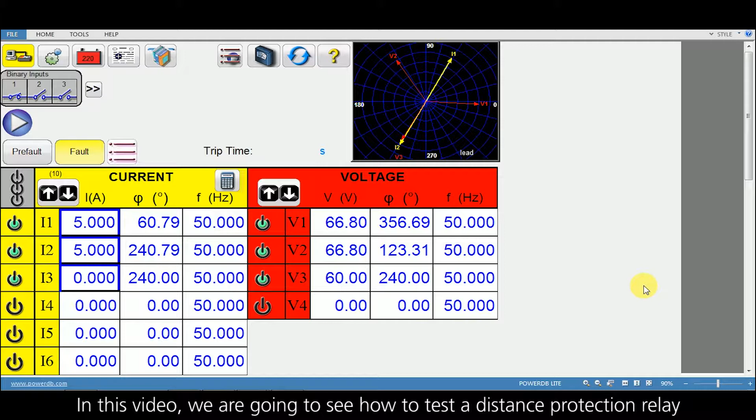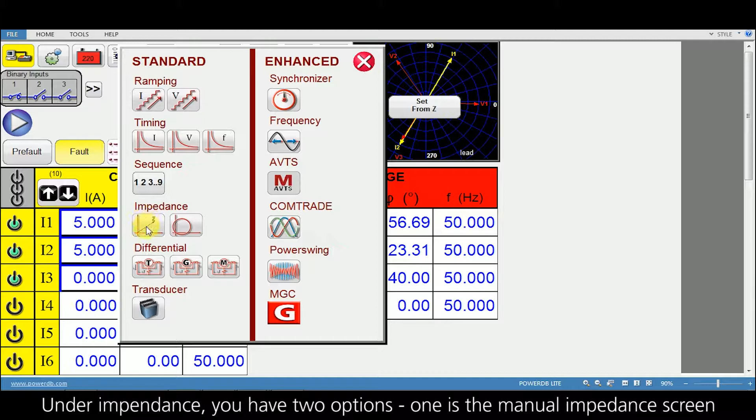In this video, we are going to see how to test a distance protection relay using the internal XRIO module. So you have the option here, the enhanced menu. When I click on this, you have the impedance screen. Under impedance, you have two options. One is the manual impedance screen, where you can enter the values and test directly without reproducing the entire relay settings, and the other is the automated module, where the full-fledged library is available. So let us see the library module.

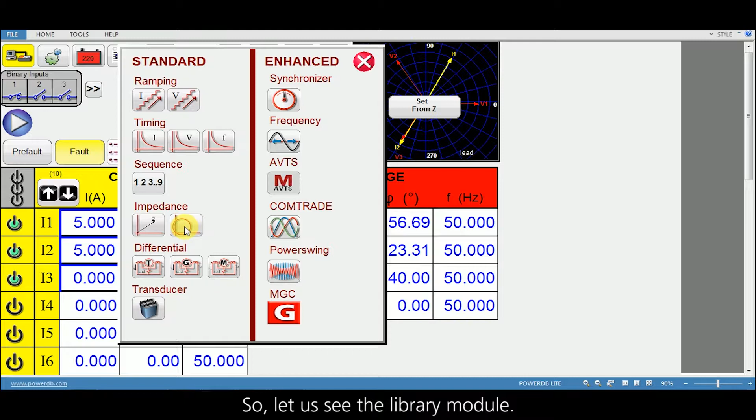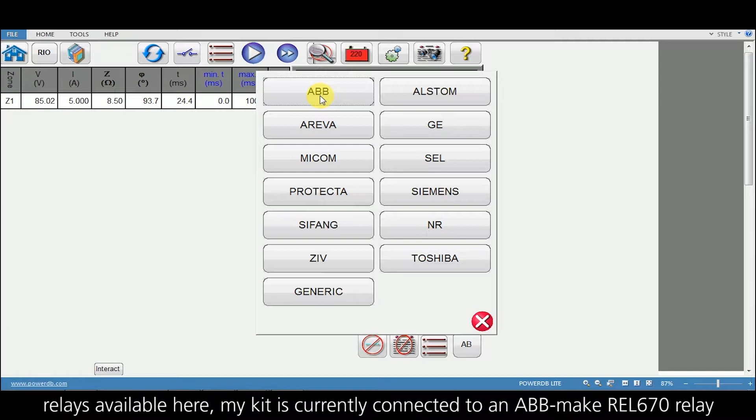In the library module, you have the option to import the RIO file and also the library. So let me click on the library. You have the list of relays available here. My test kit is currently connected to ABB make REL 670 relay. I will select REL 670 from this list, and this is the place where I enter the values as per the relay.

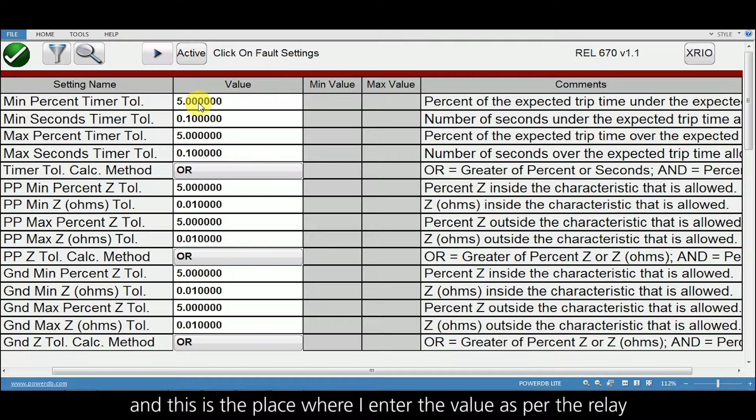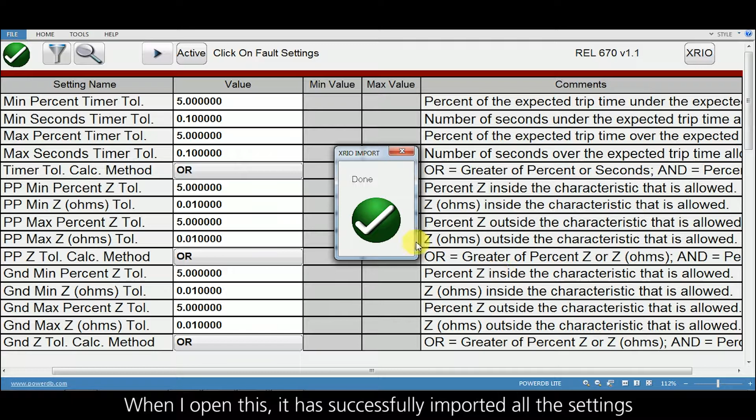Alternatively, I can also import the XRIO file, which I have saved in my desktop as rel670.xrio. When I open this, it has successfully imported all the settings. So let me put a tick mark.

You have two menu screens here. This is menu A and this is another menu B. So when I click on this menu A, it goes back to the previous menu where I can modify the values or import the XRIO file. If I click on this menu B, this is for test screen menu.

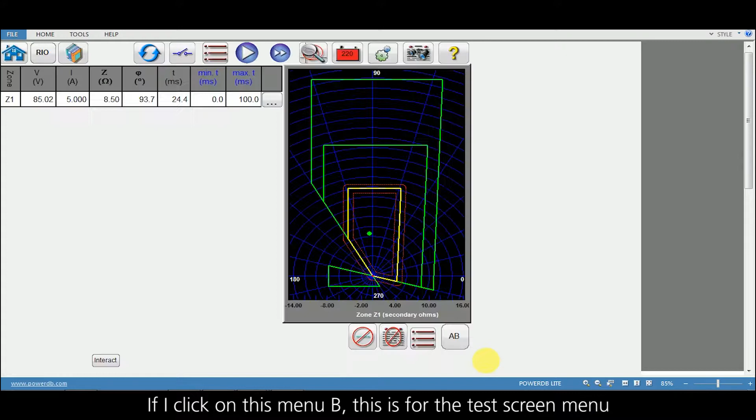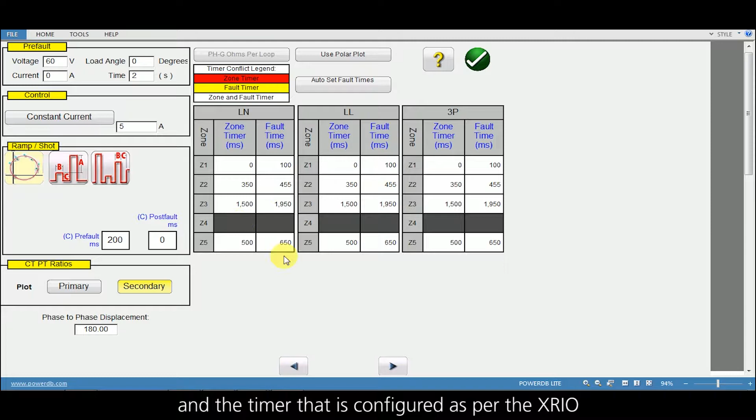So when I click on this, it provides the following options: pre-fault, control, ramp or shot, CT or PT ratios, and the timers that is configured as per the XRIO. So the REL 670 relay has 5 zones, in which 4th zone is disabled in the settings in this relay. 1, 2, 3 is configured for forward, and the reverse is configured as zone 5.

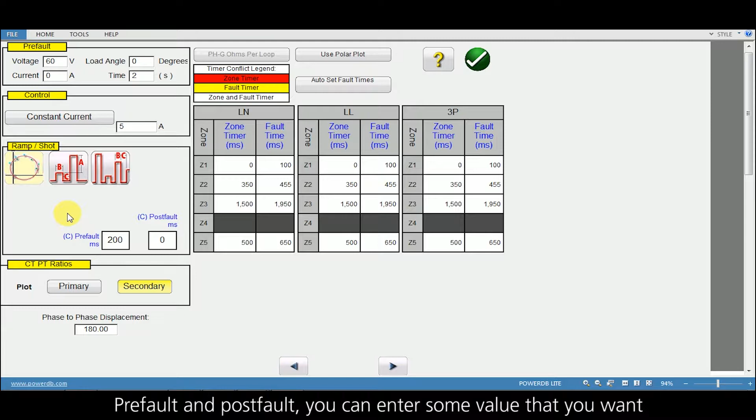Pre-fault, I have defined it for 2 seconds with 60 volt, constant current, limiting the current to 5 amps. Pre-fault and post-fault, you can enter some value that you want. Ramp or shot. So you have 3 options here. The first one is a random shot test, where you can click on any location of this impedance plane and create a fault.

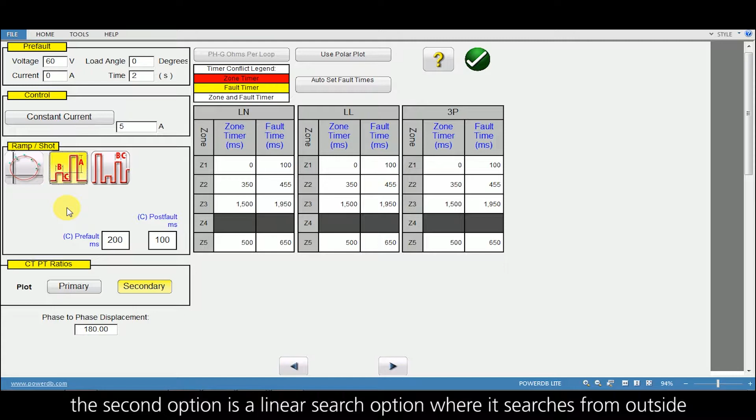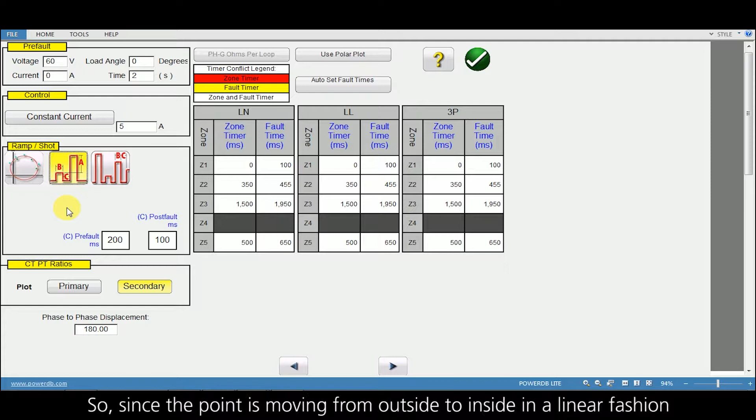The second option is a linear search option, where it searches from outside and it moves towards the zone in a linear fashion and tries to identify the exact point where the relay operates. In this way, it provides the exact point where the zones are created, the zone boundary to be more specific. So since the point is moving from outside to inside in a linear fashion, this test we call it as linear search.

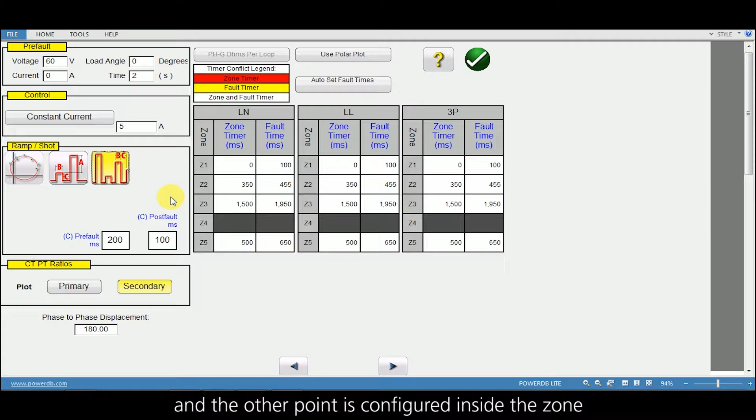The other option is pulse binary search, in which one point is configured outside the zone and the other point is configured inside the zone. So let us say your impedance boundary is at 10 ohms. So first I give a fault at 20 ohms and ensure that the relay is not tripping. Then I give a fault at maybe 2 ohms and ensure that the relay is tripping. So if this is true, then I come near the boundary.

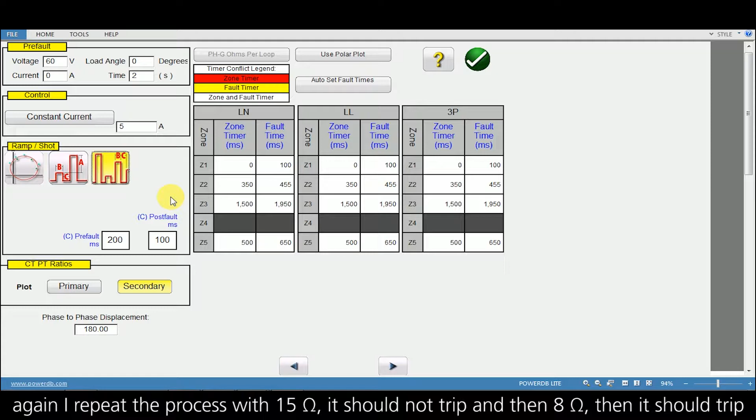Again I repeat the process with 15 ohms, it should not trip. Then 8 ohms, it should trip. Then again come closer. So in this way I give pulse binary values and identify the zone. So this is the way by which these two ramping tests are configured. So let me first play the shot test.

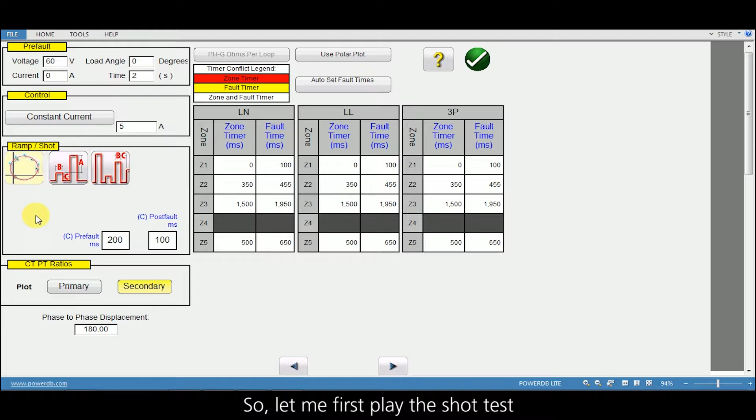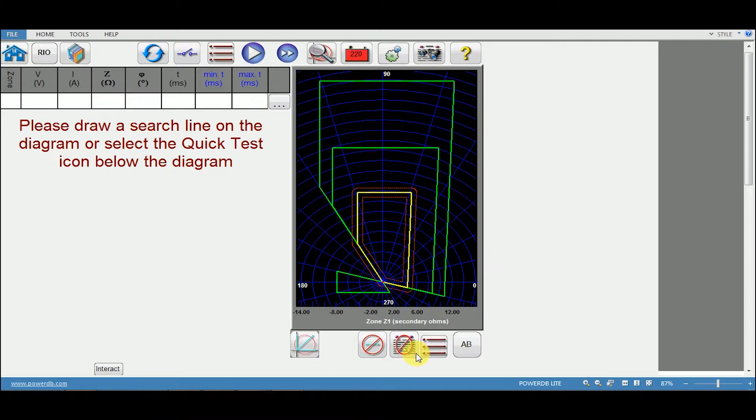We also have this polar or rectangular plot option. So let me keep it as polar so that I can view my impedance and angle. Let me clear all the results and remove all the fault types. So I have the zones as per my relay: zone 1, zone 2, zone 3 and zone 5. The type of fault I can select from here: single phase to ground, phase to phase, 3 phase. So let me select the A phase to B phase fault.

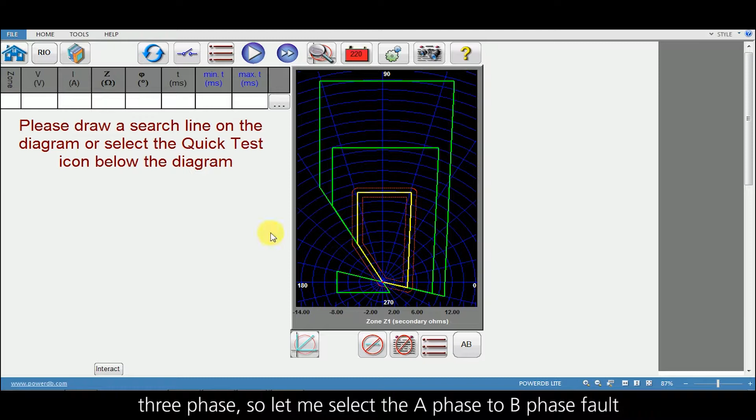So since I am in a shot test, I can click anywhere. So let me click here randomly. So the moment I click, I get the impedance, magnitude and angle, which can further be edited and fine-tuned in case required.

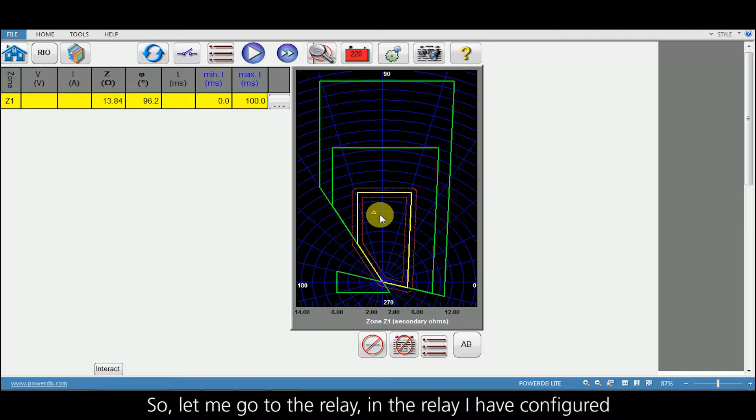So let me go to the relay. In the relay I have configured second LED for zone 1, third for zone 2, fourth for zone 3, fifth for zone 4, and sixth for zone 5. So zone 4 is disabled, we have the reverse zone as zone 5. So let me run this test. To run this test, just click this play button.

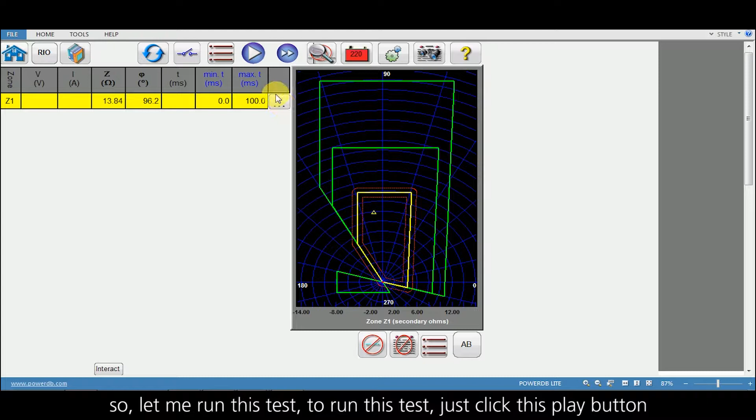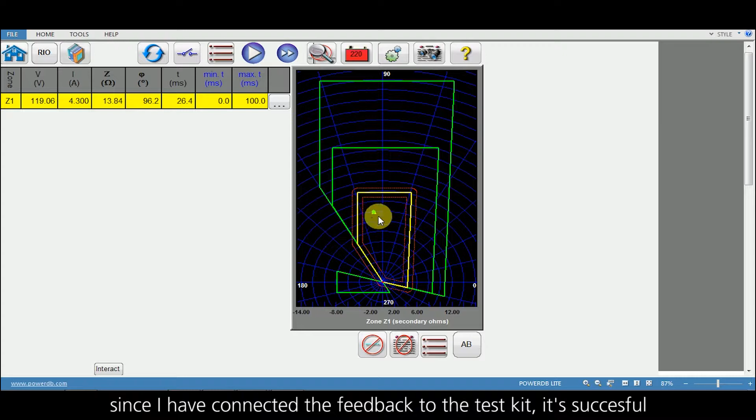You can see that the relay has tripped zone 1, and you also get the fault location here, 167.85 kilometer, which is 63%. And in the software you can see it's green in color. Since I have connected the feedback to the test kit, it's successful. Now let's go to the second zone, another point. Let me reset the LEDs.

Okay, I'm going to play this fault. This is a zone 2 fault, so the relay has operated in zone 2. So let me do a zone 3 fault. Let me reset the relay.

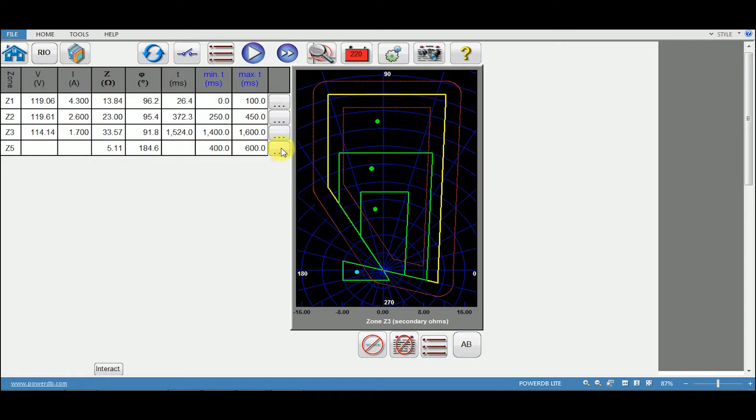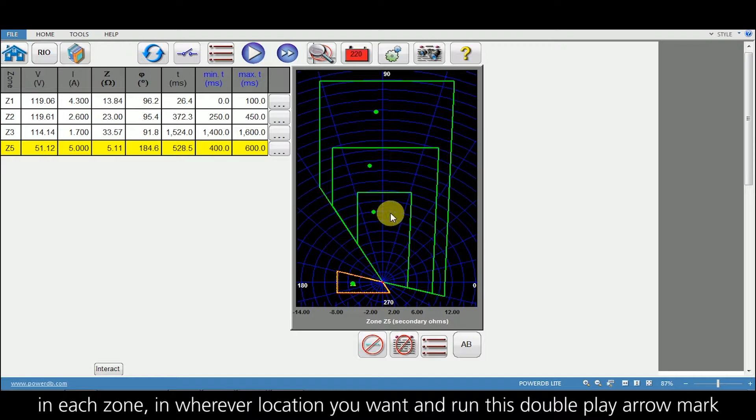Zone 3 and another in zone 5. Let me reset the relay. So this is how we do this testing. You can select as many points as you want in each zone, in whatever location you want, and just run this double play arrow mark.

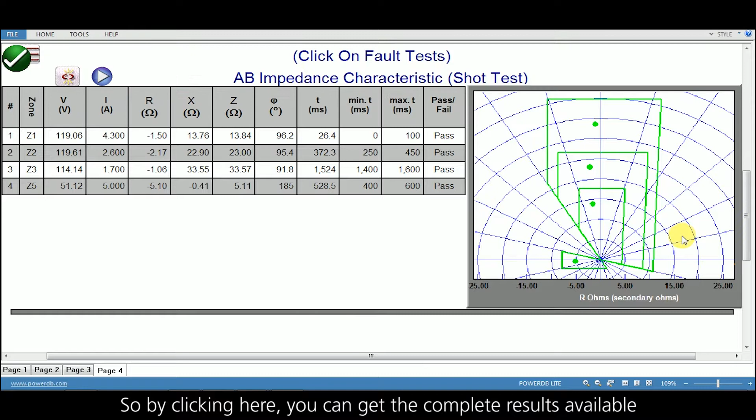Everything will be run in sequence and you get the results here. The results are saved in this location. So by clicking here you can get the complete results available. And one advantage of this results window is you can play back the fault again from the report.

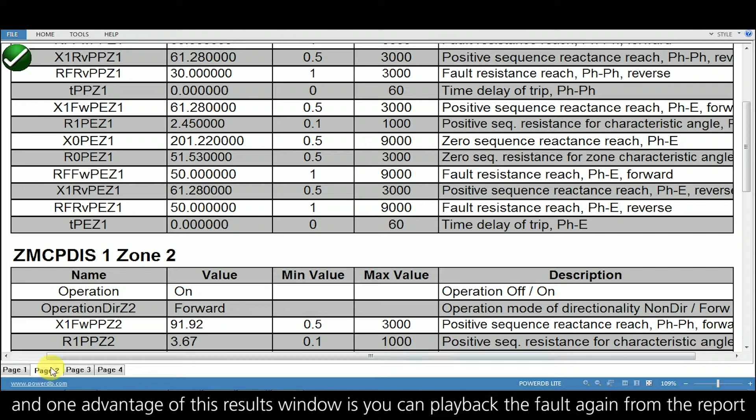So when I import or save this report, you can open it in another laptop where the software is installed, and you can import and just click on this tick mark. It goes back to the previous menu and imports from the test results.

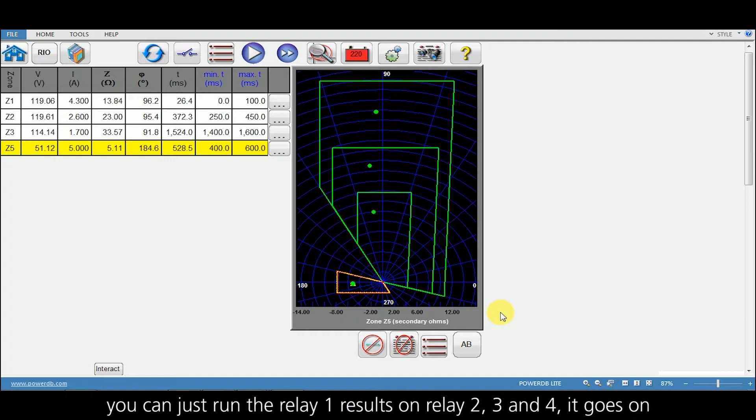So for 4 or 5 relays with similar settings, you need not create the test plan again and again. You can just run the relay 1 results on relay 2, 3 and 4. It goes on. So this is the simplest way to do it using XRIO.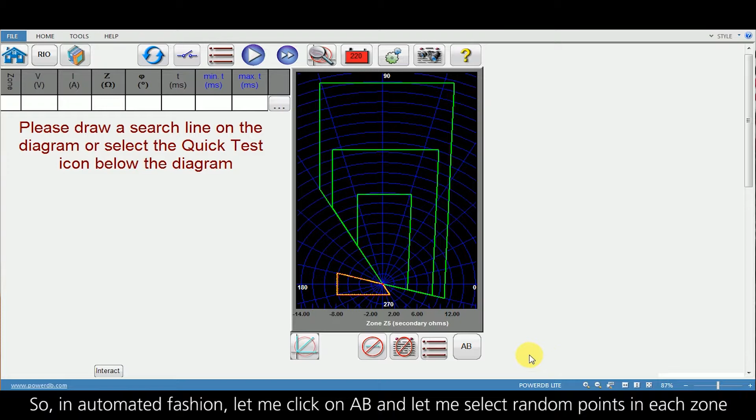Now we are going to see how to test phase to ground, 3-phase fault and phase to phase fault in an automated fashion. Let me click on AB and let me select random points in each zone. Then I am going to select A phase to ground, and I am selecting points in each zone, repeating the same process for 3-phase.

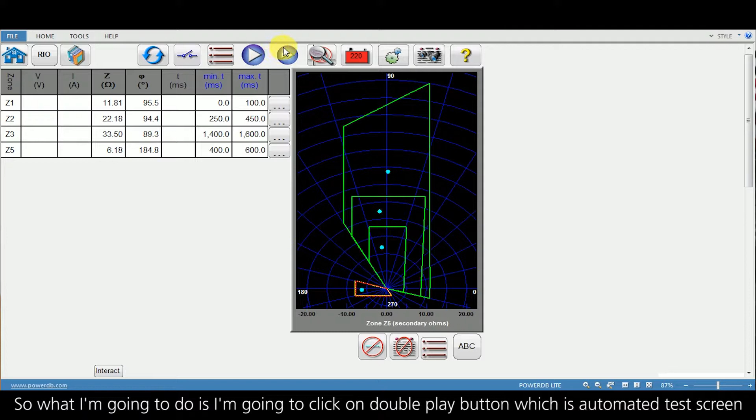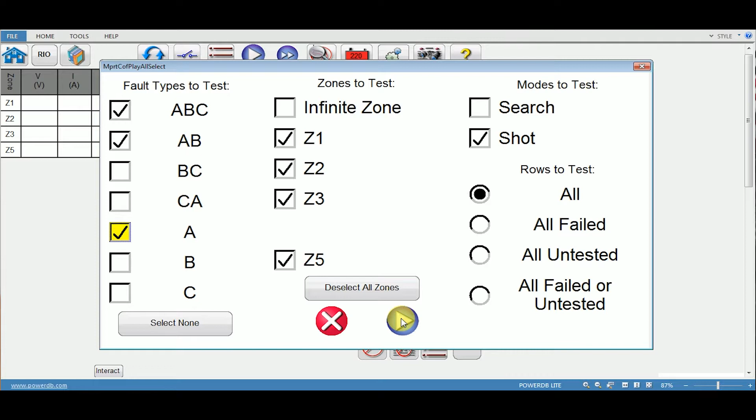So what I am going to do is click on this double play button, which is an automated test screen for playing everything. The phases you want to play, you can select here. So let me select AB, A phase and ABC for all the zones, shot test. So when I click the play button, it's going to run everything in sequence. So let's see how it works.

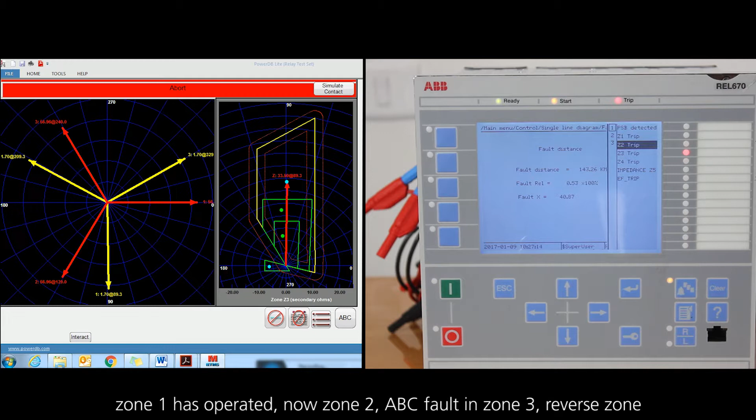Now we are going to see an ABC fault. It's injecting an ABC fault in zone 1, zone 1 operated. Now it's zone 2, ABC fault in zone 3, reverse zone. Now it has moved to AB. So the green indicates that the feedback is in accordance with the time and the test case is passed.

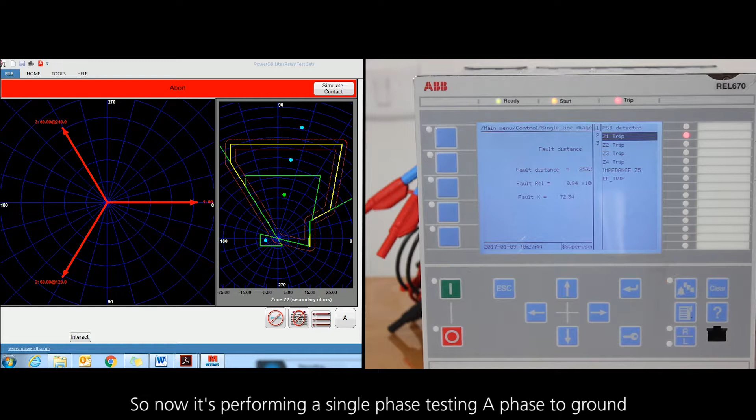So now it's performing a single phase testing, A phase to ground, for all the three forward zones and now in the reverse zone. So that's it. It's a simple test, and you can see the results here by clicking on this tab.

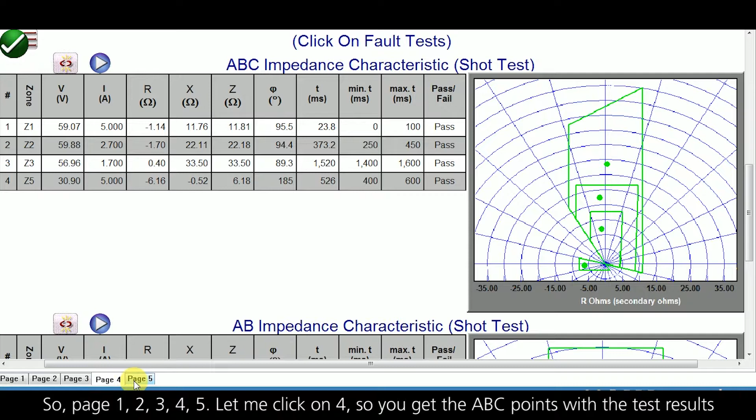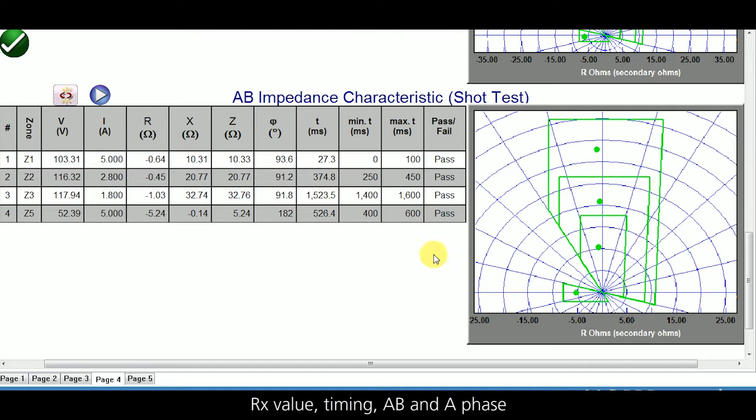So page 1, 2, 3, 4, 5. So let me click on 4. So you get these ABC points with the test results, RX value, timing, AB, and A phase.

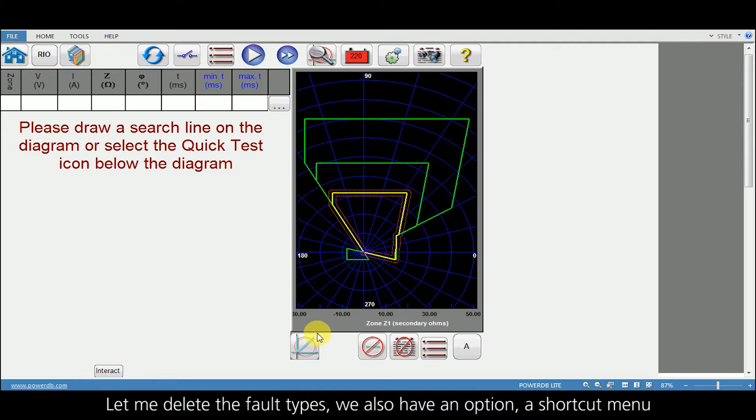In shot test, we are going to see one more option for choosing the number of points. So we saw the random clicking of points like this in each zone. Let me delete the fault types. So you also have an option, a shortcut menu. So by pressing here, it automatically selects the points. So it's a quick way to do the testing.

Now let us see the results section, how to play the file back from the results. For that I am going to do a shot test with 2 points, which is already tested. So let me run the test again. One in zone 1, and another point in zone 2. I have done both the tests for R phase to ground, A phase to ground here.

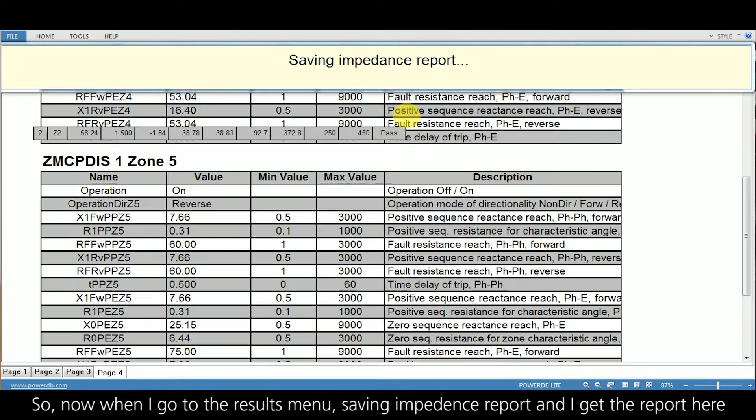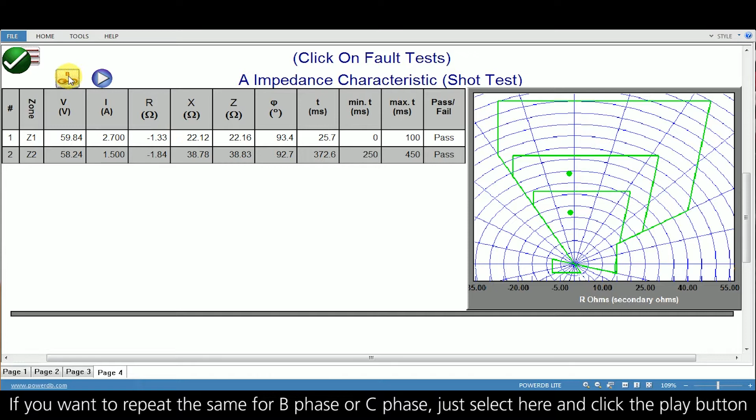So now when I go to the results menu, saving impedance report, I get the report here. Now from here you can see I can select any phase. So we have already done the result in A phase. If you want to repeat the same for B phase or for C phase, just select here and click the play button, execute all in group C.

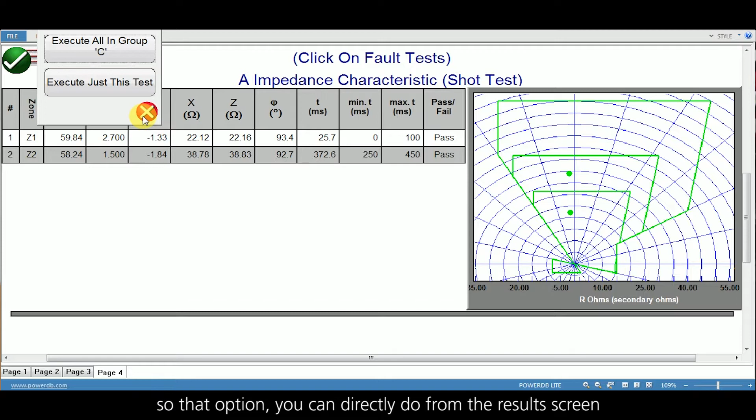So this means if you want to do all the list of tests, in case you have 10 tests, it will just execute them all for C phase. So that option you can directly do from the result screen. So now let us see the ramp test, the linear ramp method.

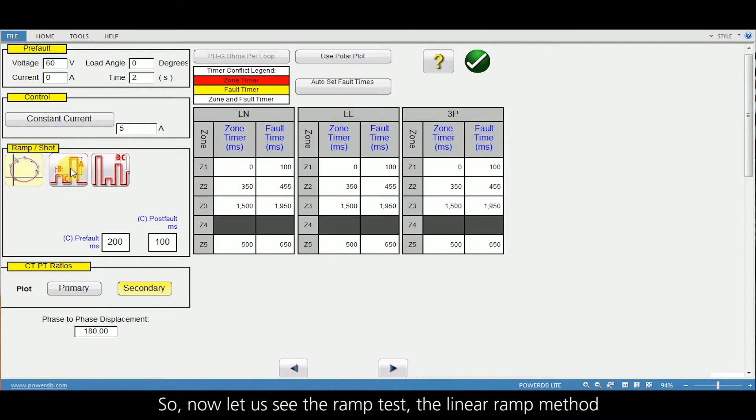Let me select the linear ramp, and I am going to do the boundary search using linear ramp for one forward zone and one reverse zone. So here there is a button called a magnifying button, so I can zoom which zone I want. So let me zoom the forward zone. This is the biggest zone.

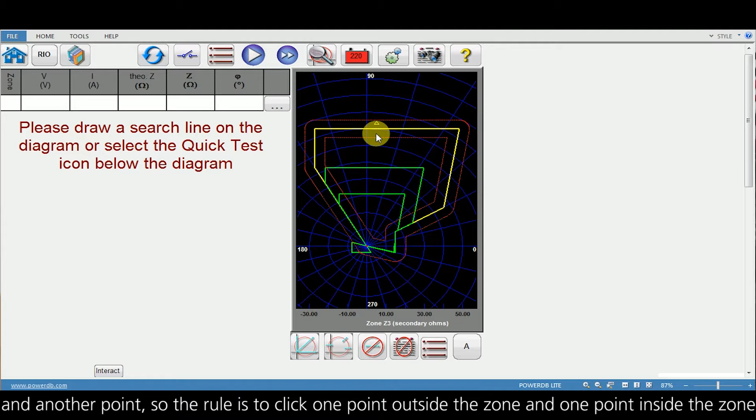I am going to click on one point and another point. So the rule is you click one point outside the zone and one point inside the zone. So what the test does is it starts injecting a fault from this point, the outer point, and slowly moves towards the inner point linearly, and the moment it touches the line it should operate. So it searches for the boundary in the location where you have clicked.

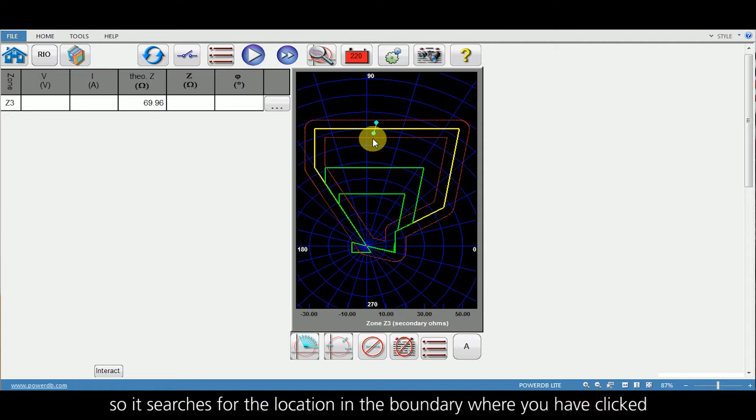So let me zoom for zone 5, the small one in the back. So I am going to click one point outside and one point inside. The closer the better, otherwise the test is going to take a lot of time. After doing this, the points that I have entered are here. Forward is zone 3, reverse is zone 5. So let me run zone 3, the outer zone.

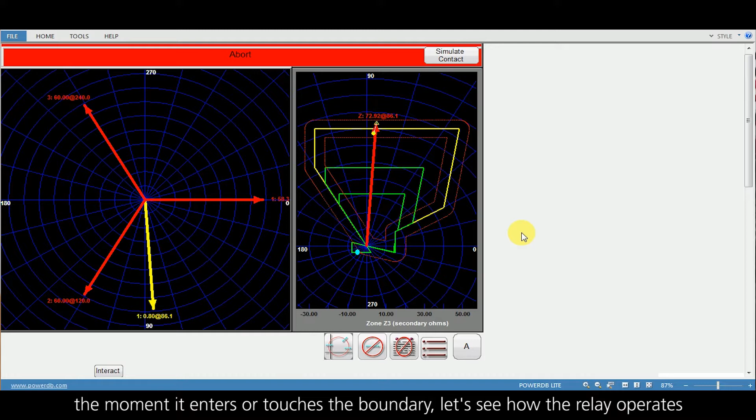So you can see it starts injecting from the outer part of the zone to the inner part of the zone in A phase to ground, which is selected here. So the relay LEDs are in reset condition, and the kit is slowly moving towards the zone. The moment it enters or touches the boundary, let's see how the relay operates.

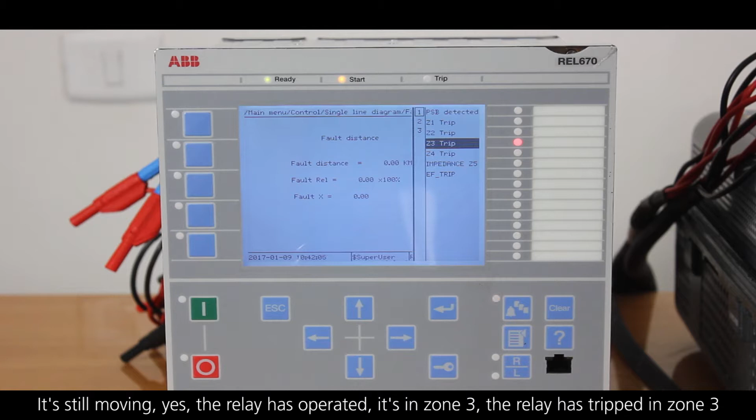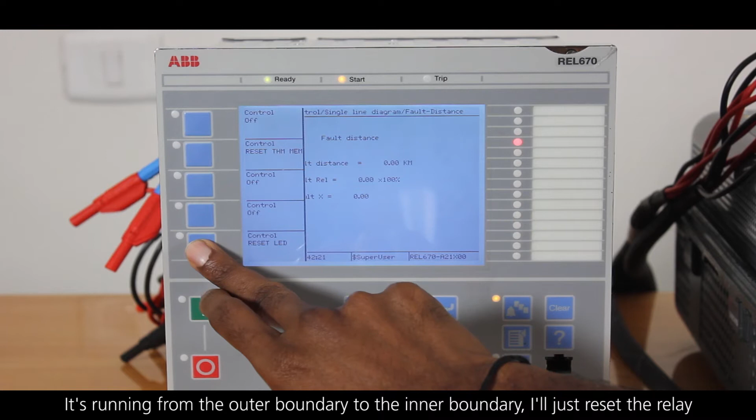It's still moving. Yeah, the relay has operated. It's in zone 3. The relay has tripped in zone 3 and the operation point is in green color. And this is the reverse zone. Let me play the reverse zone now. It's running from the outer boundary to the inner boundary. I will just reset the relay. Yes.

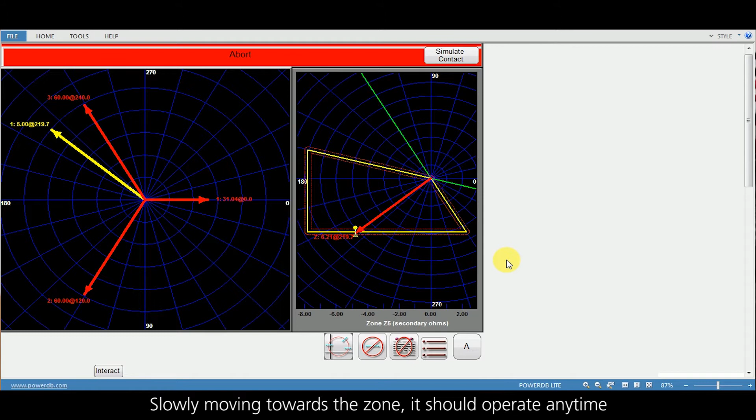Slowly moving towards the zone. It should operate anytime. Here you go, the relay has operated. So this is the way by which the linear ramping method works.

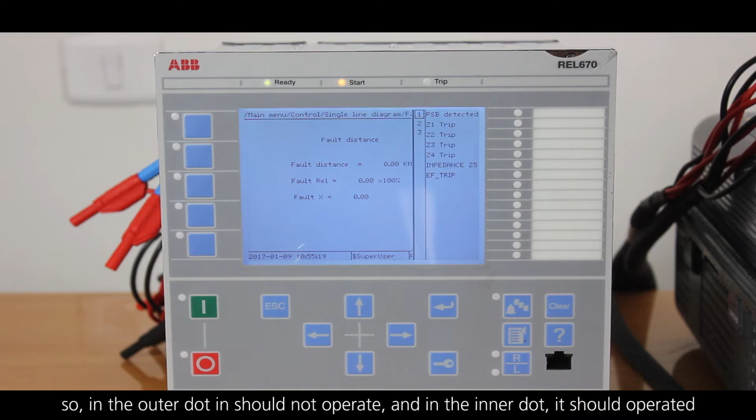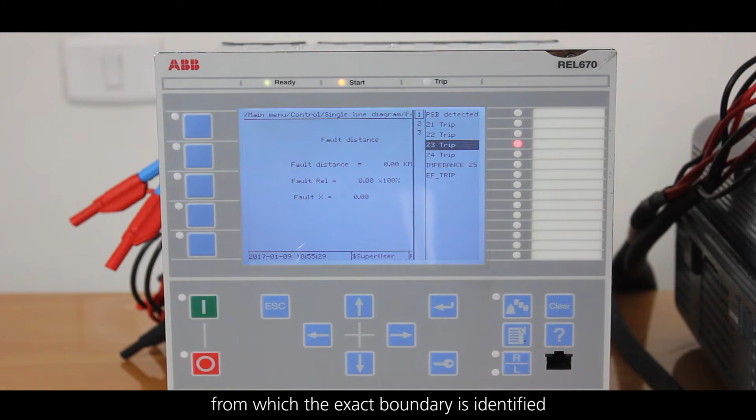Now let us see the pulse binary search method, the third type of testing in this module. The same 2 points, one for zone 3 and the other for the reverse zone. So let's see how fast it is going to work. The concept is one in the outer dot and one in the inner dot. So in the outer dot it should not operate, and in the inner dot it should operate. So the test is continued till you get 2 continuous trips from which the exact boundary is identified. So you can see how fast it is able to identify the boundary.

Let me do it again for the reverse zone. So compared to the earlier test, the linear search method, the pulse binary search is a very fast way of identifying the zone. It has identified. So you can click as many points as you want in various locations in each zone and repeat this step. By clicking on this double play button, you will be able to perform everything in a single shot and you will get the results in a single screen.

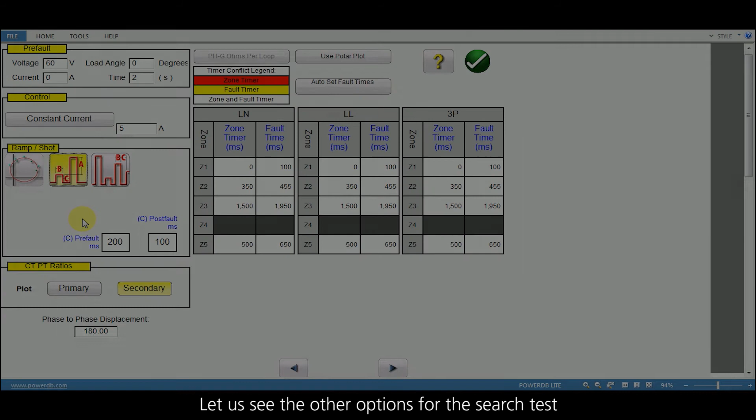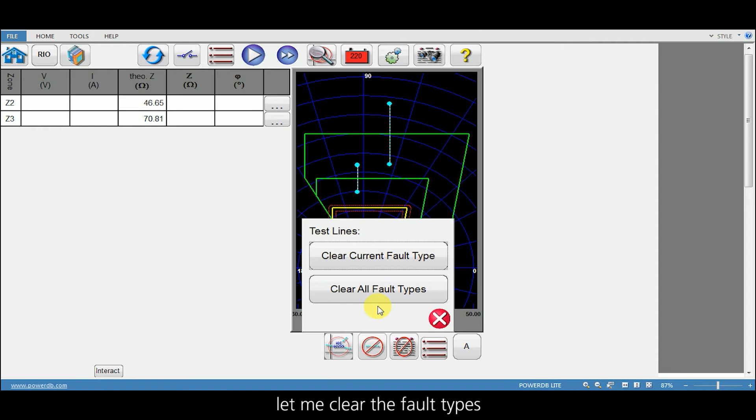Let us see the other test options for the search test. So this is the linear search and pure binary search which we already saw. So now we are going to see the shortcut for the testing methodology. Earlier we randomly clicked on the points, one outside and one inside the zone, and it was able to do the test. Let me clear the fault types. You have 3 options here. One is IEC 60255, the other is a 5-line display, and the third is a 3-line display. Let's see one by one.

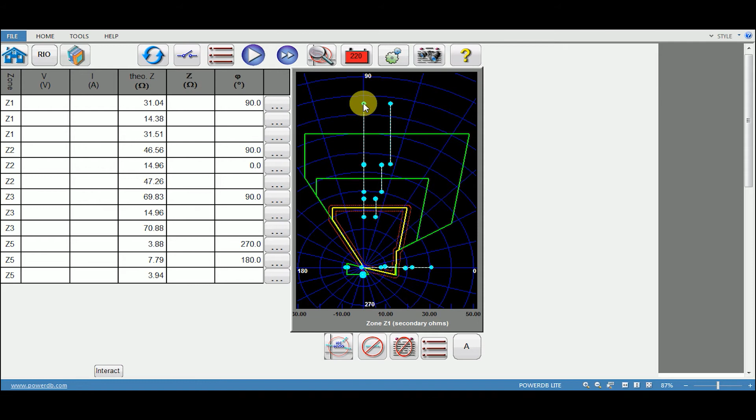When I make it IEC 60255 and click on this point, automatically you have 3 points in each zone assigned, and it will be perpendicular to the x-axis as per the IEC 60255 standard. So let me delete this type and see the next one.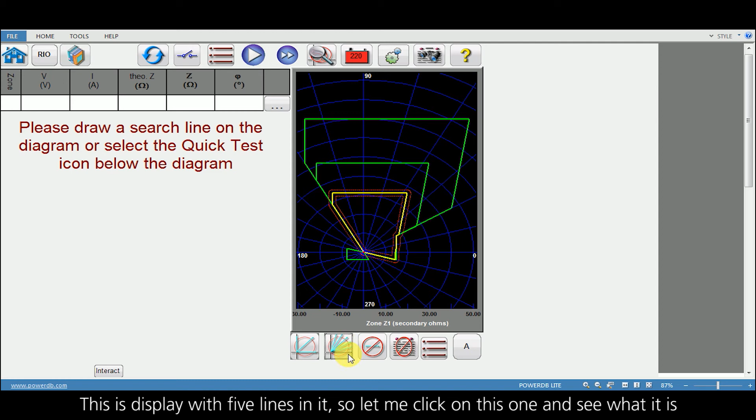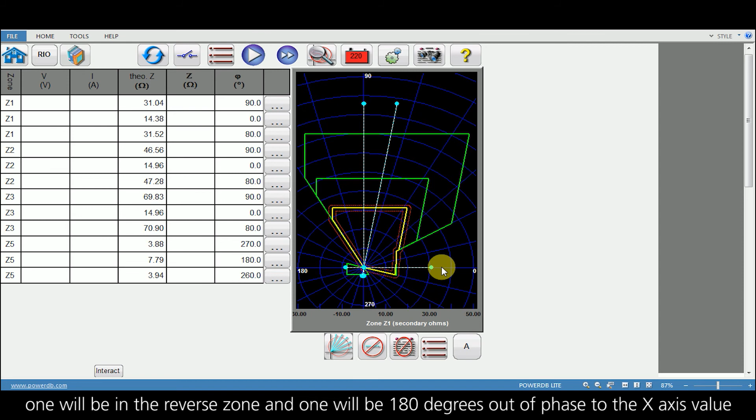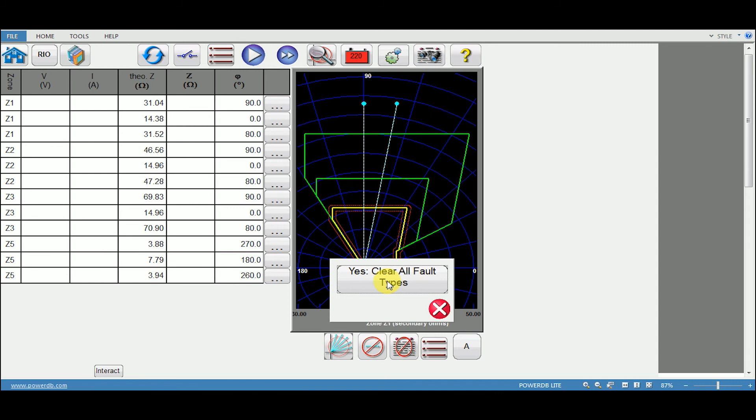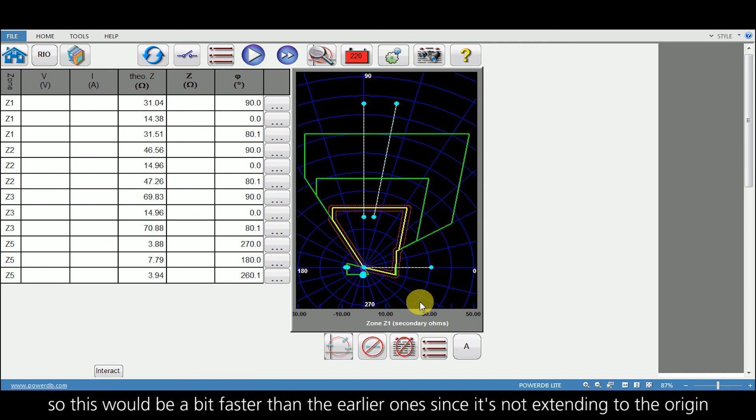So let me delete and see the third type, which has 3 lines in it at the boundaries. When I click on this, you can see the only difference between the previous one and this one is it doesn't extend up to the origin, but here also you get 3 points in each zone. So this would be a bit faster than the earlier one, since it is not extending till the origin. So when you run the test, it automatically executes all these points and you get the results.